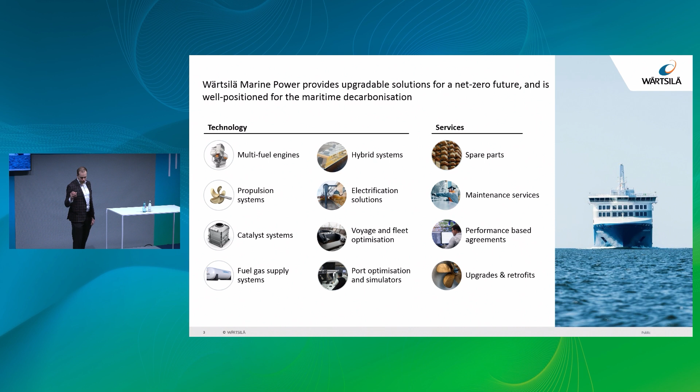But nevertheless, this is how our core product looks like. It's a 4-stroke engine, and there is a guy for scale. So we are dealing with big iron.

And that was also one of the first comments that I received when I entered the house in 2017 as a young boy. The old timers were saying, okay, yeah, but look at the product. What can you 3D print with your small little Ultimaker or shoebox-sized metal printer? Doesn't make any sense.

About the product itself, this is the Wärtsilä 31 engine. It means the piston is approximately 31 centimeters in diameter, one piston.

Overall energy production of this system is approximately 10 megawatts, which is approximately 100 times more than what you all guys have in your car engines. So this is quite a beast. These engines are consuming approximately 1 cubic meter of fuel each and every hour this is operating. But this is something about the kind of industry we're dealing with.

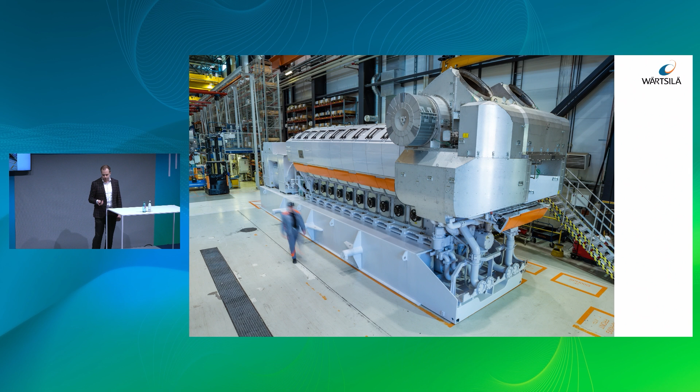At the moment, we're living in a VUCA world, which is short for volatility, uncertainty, complexity, and ambiguous things.

So it means that when we're talking about decarbonization, everybody's talking about it, everybody wants to enable it. But how to make it happen in a nowadays industry based on fossil fuels is that we actually have multiple different options, and nobody knows which is going to be the winning card.

So that comes into this flexibility. We as a company have to provide this flexibility so that eventually, when things get clearer, we have a selection of solutions for each of these options. Let's say we have 5 different fuels compared to the fossil fuels that we had in the past. It's quite an interesting position at the moment, I have to say.

But for us in AM, it's actually quite good news. We can deliver flexible and innovative solutions in a quick manner, and also deal with phenomena that we have never seen before.

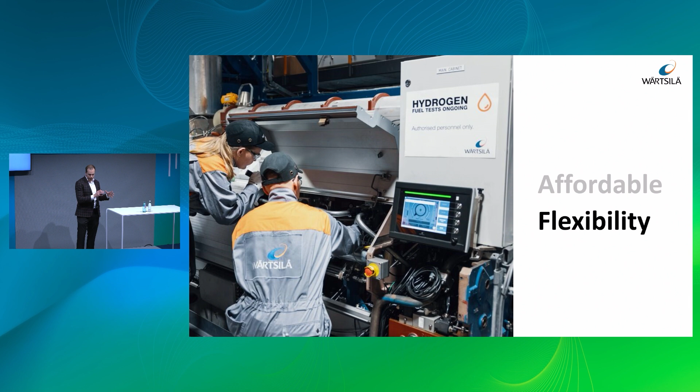But that's only one half of the whole situation. It also has to be affordable, meaning that the fuel consumption is one of the key driving factors throughout the life cycle of an engine. The other one is the cost, initial cost. So we have to win in both of these fields in order to actually make an impact. If we make the best product in the market, nobody wants to buy it. If we want to make the most cost-efficient product in the market, but it still sucks in the life cycle, nobody's going to still buy it.

And yeah, new fuel development is really rigorous at the moment.

These two things, flexibility and affordability, we also started to target back in the day, in 2018, where we started our team. We started with small little things on the shop and factory floors. You can see some of the high-performance tools that we came up with thanks to 3D printing. All of these joint pieces have been 3D printed, and the rest of the structure is just pipe structure. We were able to achieve 80%, 90% cost reduction and weight reduction, both, and this is only impacting the factory floor already. So we knew that we are in the right field. Major part still of our production is on the polymer side, we're employing approximately 15 FDM printers in our factories.

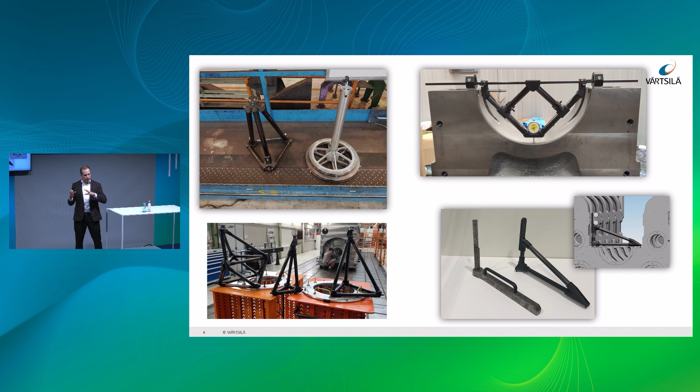And then we are printing approximately 1,000 kilograms of PLA and other polymer materials per year at the moment. So we're printing quite a lot, thousands of easy peasy pieces that we need when we manufacture our products. That's the first goal that we achieved. But that's only one part of our story.

How is it going to be? Yes, the second step that we took also addresses the affordability side. These are two of our products. On the left-hand side, the leak block, it's the size of a football, 1.2 kilograms of printed part. We are going to serialize that. I believe the start of the assembly of this engine, the first engine, will happen this December. So that's going to be one of the serial parts in our engines because it makes more sense cost-wise to make it by 3D printing than manufacture it by machining.

The other part what we see here is old versus new. On the right-hand side, you can see the new one, which is 3D printed, utilizes design freedom, and it's approximately 98% less weight, and it's also more cost efficient than the conventionally made one. There you can see quite a huge difference in the system and part cost level that we are able to get into the systems that we produce.

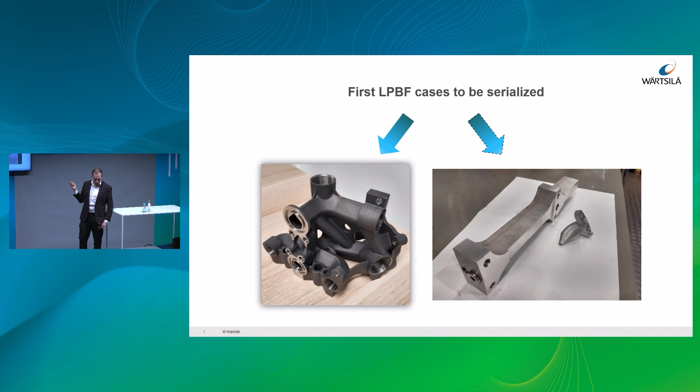So again, this is the same part. It's doing exactly the same function, but it looks completely different. And that is also one of the challenges that we have, because nobody in their right minds would actually believe that we are able to do it without seeing an actual example showing that it works.

But this is not the whole truth. The examples that I showed are mainly from the left-hand side. Our actual target for shaping the flexibility, shaping the decarbonization, those are happening on the system level and also the performance part level. It takes time, it takes years. We are now on the 7th year of development, and finally we are reaching those two levels, only the first examples, but we are getting there.

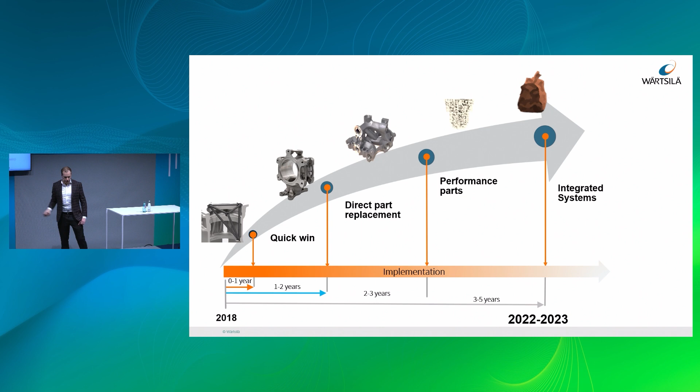And I would say that we are more or less mastering now the two of the left-hand side sections. This is the roadmap that we have been following since 2018, and again, importance on the right-hand side, it's getting more and more important.

I just wanted to show that we are also doing other things than what we are showing here. But again, so what? Does it really matter that we are good if our supply chain, which actually produces 70% of our products, is way below what we are understanding on additive manufacturing? You know the answer. So again, we have to strongly affect also the SMEs, small and medium enterprises, who are actually, as you heard, forming the majority of our company in terms of manufacturing volumes.

And this is also the actual business that AM can make happen if this big segment, as mentioned, 99% of the industries are not that familiar with AM yet. We want to change that. And we want to be the living proof that this is actually possible.

We can start by understanding how nowadays OEMs, such as Wärtsilä - I'm not referring to AM OEMs, but the users, those utilizing AM as OEM - and then we have the SMEs, typically small machining workshops who are delivering parts and solutions for us. There you can see their main interests: OEMs are obsessed only with their parts, whereas SMEs are obsessed with proven technologies so that they can do reliable business.

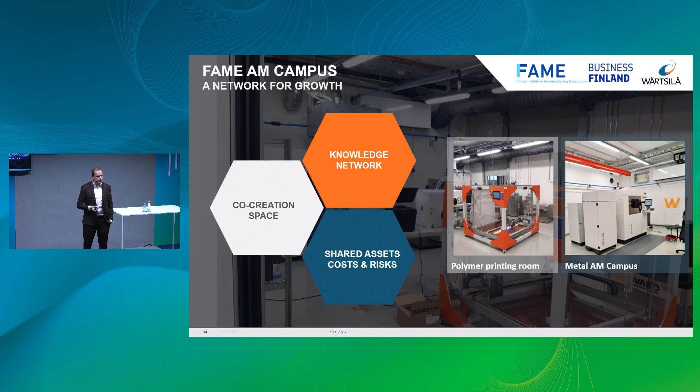So it consists of 3 key ingredients: knowledge network, the people, shared assets, and sharing the risk. This M290 by EOS is paid for by 5 companies, and thanks to that we were able to equip it with, for example, OT monitoring and smart fusion systems. We cannot afford those kinds of systems alone. None of these players could, but together we are able to do it.

About the shared information, this is more driven by FAME, where in this case we are the ones who follow, not leading. This is one example of common vision in practice. In Finland alone, we have a little bit shy of 6 million people, but in FAME we already have 50 members. So a small country can make a significant difference in AM nowadays by trusting each other and focusing on key problems.

Everybody in our industry was saying a couple of years ago, okay, this is nice and fun, but we're still missing the material data. So let's do something about it. We launched this open material database project. Thanks to Business Finland funding and FAME leadership, we're testing and printing with every service provider in Finland on this platform, and sharing the results within the FAME member companies.

We are testing impact strength, tensile strength, powder material quality when recycling, fatigue strength, and so on—10,000 material samples on the basic materials and the basic parameter sets that OEMs provide. This is only one thing we're sharing. There are big companies and small companies, and each will get a piece of this information. GE and Siemens have probably done something similar a couple of years ago, but it's not widely spread and not even available for a company our size. Imagine a company with just 10 people—impossible without this approach.

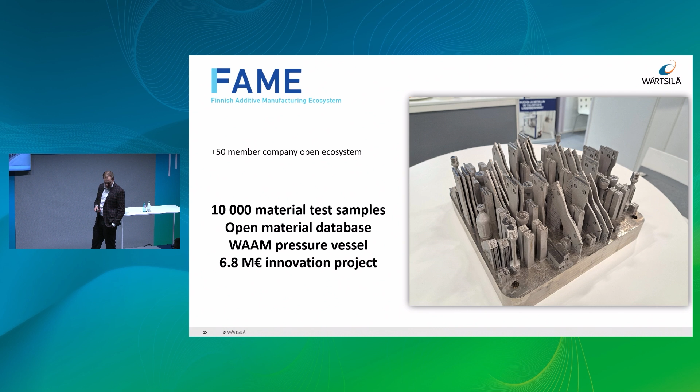I also wanted to include a slide about being first in the world and first in Finland at the same time, with new technologies. As FAME, we wanted to know how wire arc additive manufacturing technology is nowadays—you can produce quite big components with it. So we selected a supplier among our FAME member companies, Andritz Savonlinna Works, because they were already quite good in robotic welding and big industry projects.

Together we designed a pressure vessel, tested it, and it's presented in the FAME booth downstairs—booth D68, if I recall correctly. Go check it out, you'll also see the testing results. It was burst tested, meaning we tested how much pressure it can take, and the results were quite magnificent. First of all, it holds pressure—I can tell you that.

As my conclusion, all good presentations have some sort of quote, so I chose the corniest one I could find, but it holds true: if you really want to go fast, you can go alone, but then you'll fatigue yourself quite easily. If you want to collect critical mass around a common vision, you're actually getting quite far. With those remarks, thanks for the attention.